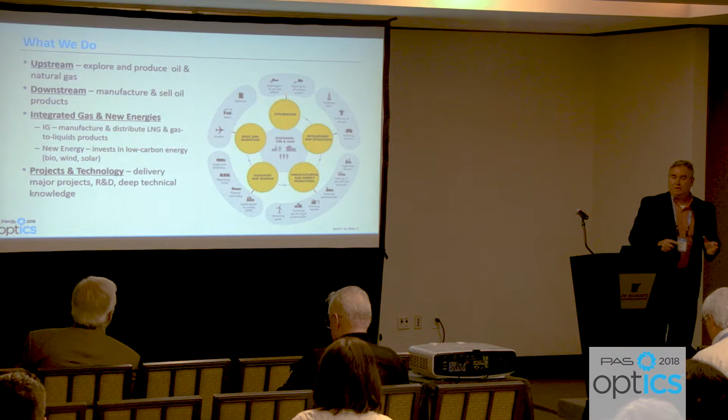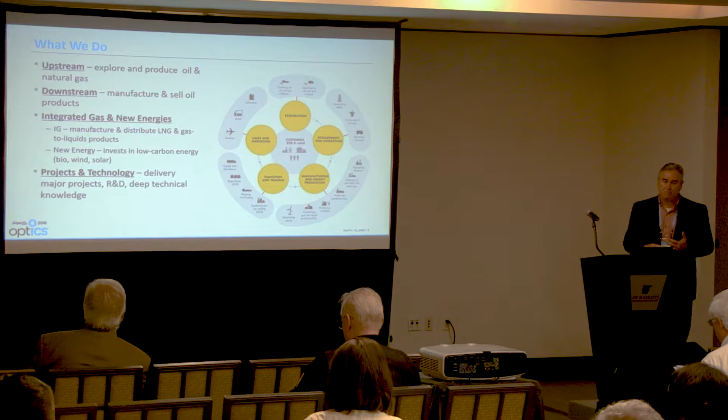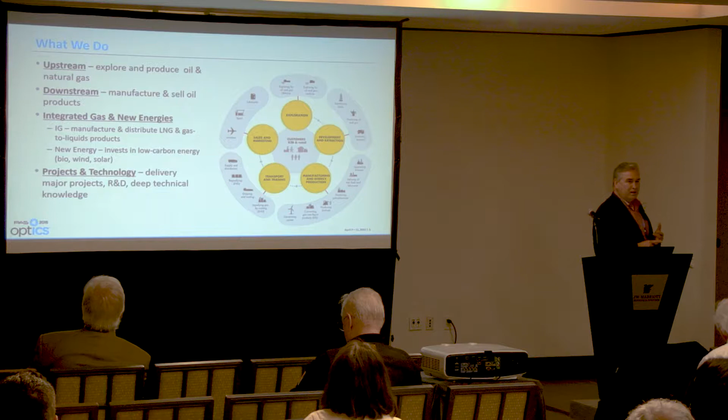So what do we do at Shell? We have four main lines of business: upstream, downstream, integrated gas and new energies, and our projects and technology group. In upstream, we explore and produce oil and gas reserves. In downstream, we convert oil into a range of refined products and sell them. In integrated gas, we manufacture liquefied natural gas and a range of gas to liquid products. And we also have a new energies group, which is looking into new low carbon footprint opportunities for the future.

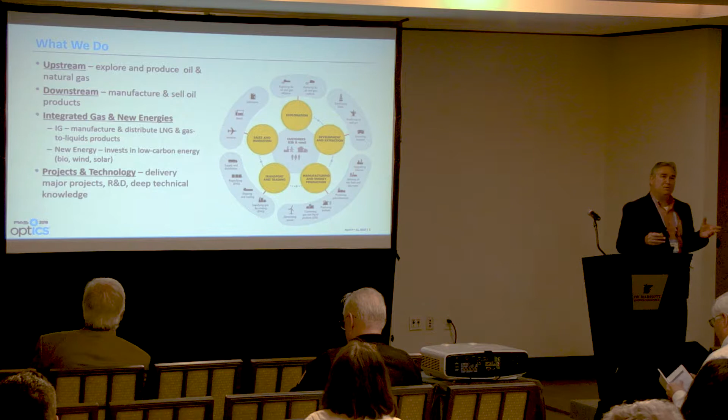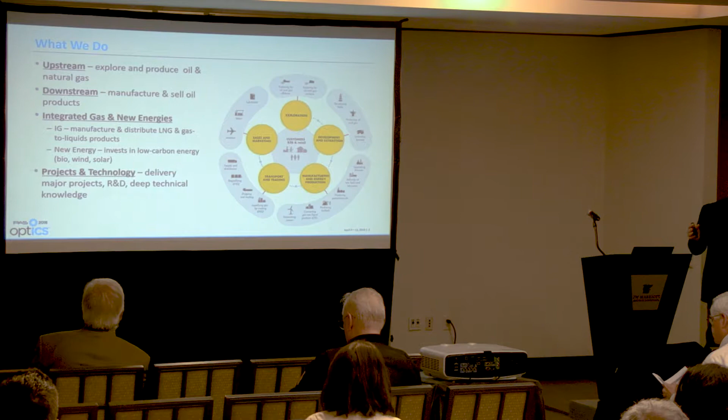And then in our projects and technology group, which is where I work, we're responsible primarily for delivering the capital projects into Shell's lines of business. It also houses the R&D function, and many of the technical experts we have across Shell, across the various disciplines like electrical, mechanical, civil, and in this space as well, are in P&T.

So today I'm going to talk about how we manage the ICS security risk within Shell. There's a term, process control domain, that we use so often that I'll be using it in the presentation. The process control domain houses our automation systems or our industrial control systems.

So again, it's a process. We call it manage PCD integrity, and it's supported by various things. We have leadership teams in place that are responsible for the process. We have technology that is supported. We'll talk about our secure plant technology, and that's a managed service from IT. We use reference architectures to standardize things.

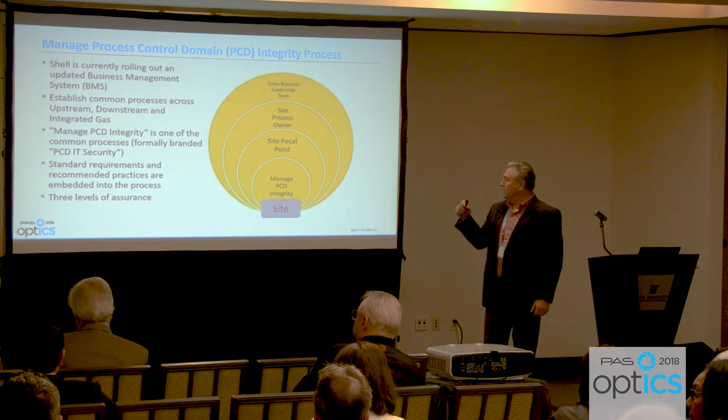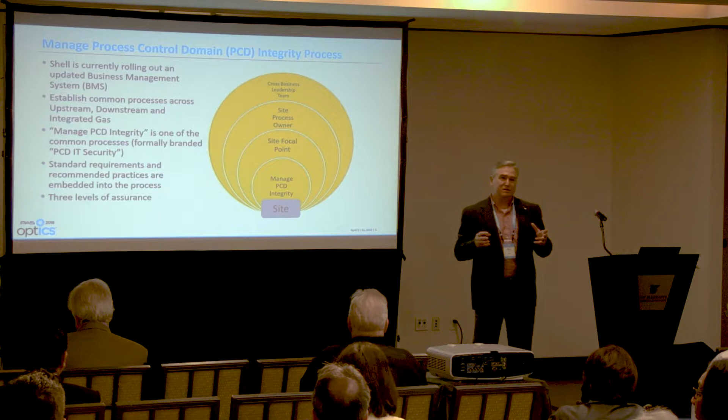It's anchored at each site, and we have a lot of sites across the globe. Each site has a site focal point that is responsible for the day-to-day implementation of our controls that are part of the standard, as well as sustaining those controls over time. Then we have a site process owner that is accountable for the process at the site, supports the site focal point, and is part of a business leadership team.

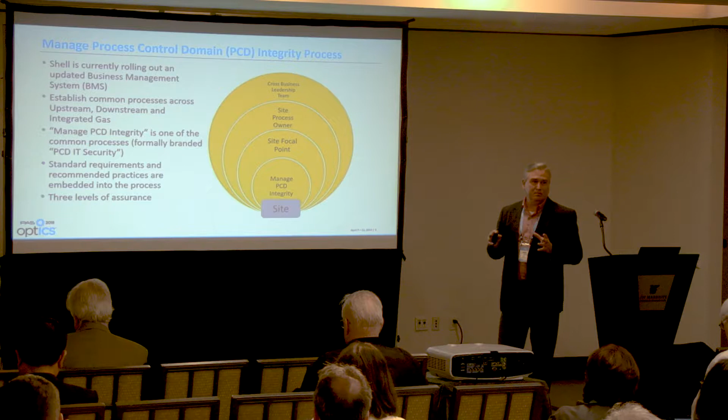And then we have a cross-business leadership team that is responsible globally for this process across Shell. They have regular meetings to talk about the health of the process, and it's a continuous process to move things along in terms of improvements. So this is the basic hierarchy of how it works. There are other things involved, and it's supported by standard requirements and an assurance model, which I'll talk about.

So within this business management system that we have, there's some standard documents, and one of them is a standard. The standard is those mandatory requirements that we have to implement in a given process, in this case, PCD integrity. We also have a document of recommended practices.

This is a little bit of a shift within Shell. In the past, we've sort of had one standard that represents our minimum requirement. And now we have a standard that's possibly even less than that, but the realization is that the sites have different risk profiles at the end of the day. And so the sites are required to implement these standard requirements, and then do some form of risk assessment to determine what, if any, of the recommended practices they should be deploying. So it's a risk-based approach and lets the sites implement the right level of security.

In our documents themselves, we're starting to organize them according to the NIST categories to sort of tie that to NIST. And when we're coming up with these controls, we're reviewing not only the NIST standard, but the IEC 62443 and even others. And again, to come up with these controls, we're working with both IT folks and engineering folks together on these initiatives.

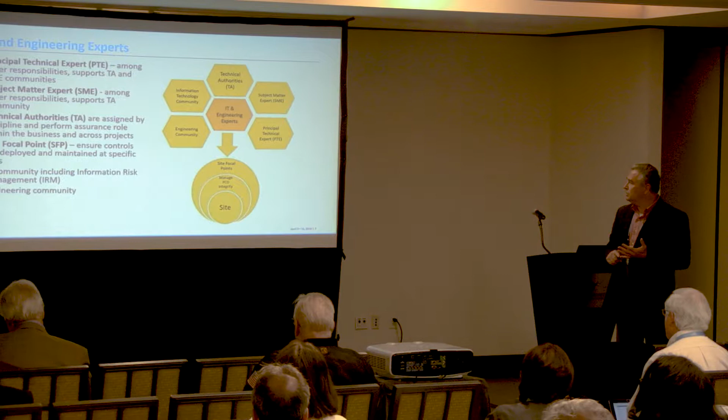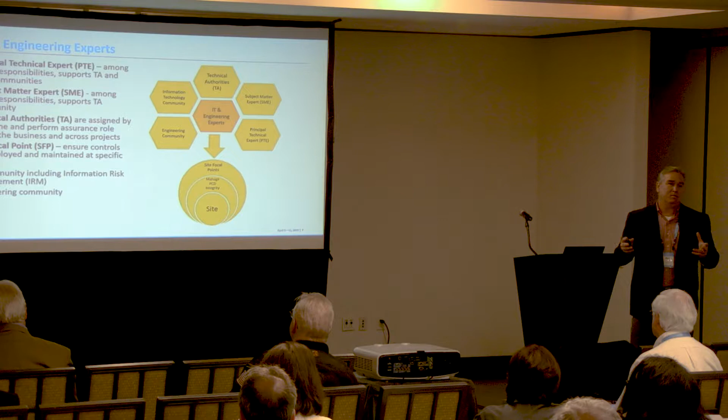So some additional roles that are used to support the process. We talked about the site focal point. We also have a role called technical authority. Technical authorities are folks that have been formally assessed for their knowledge in this space. Their role within the lines of business is to support the site focal points in terms of management of change, making sure that we're following and interpreting our requirements correctly when we implement new controls or change things. They also have a role within projects.

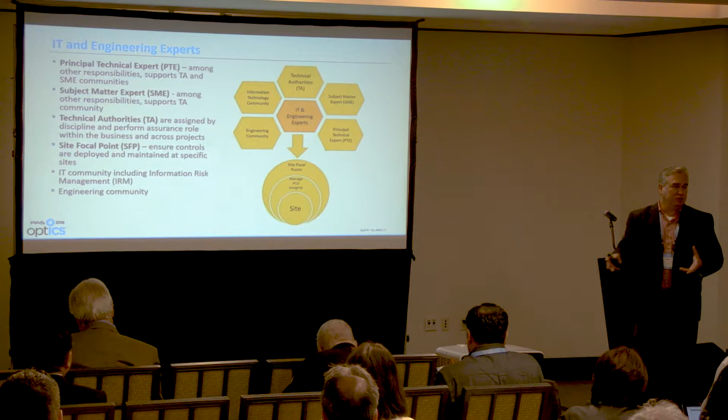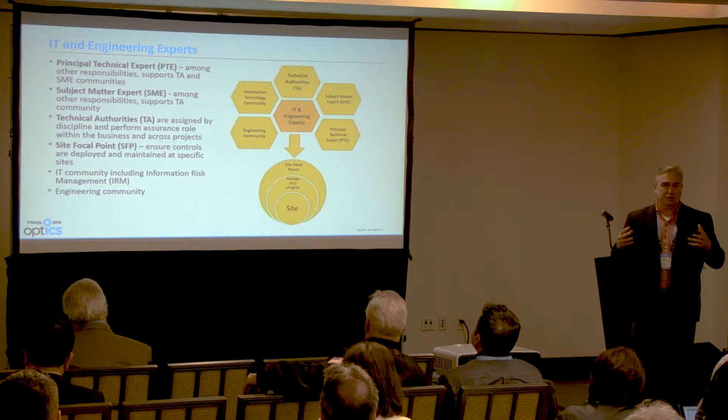So we do a lot of projects, and we roll those into the lines of business, and those projects need to have these controls built in when we hand them over to the business so they can operate this process. And so the TAs are involved in assuring; projects tend to be document-centric, so they're assuring these documents and assuring that the service providers are delivering the controls that we expect.

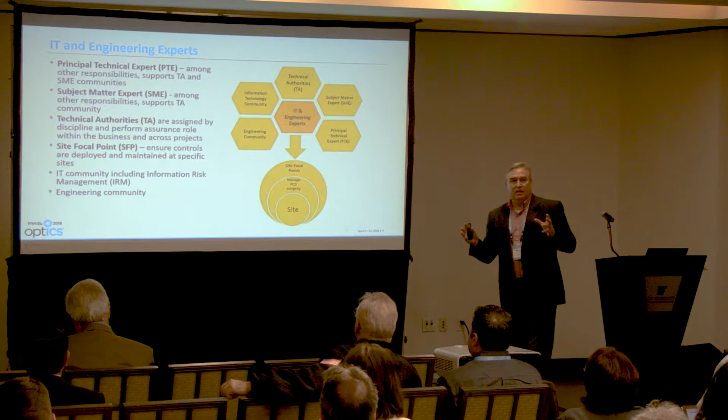Subject matter experts: again, the same hierarchy is used across all the disciplines within Shell, not just PCD integrity. We try to identify a few subject matter experts across Shell per discipline, and they will help with more technical things, interpretations where there may be some gray area in our requirements, and get involved in some technical situations.

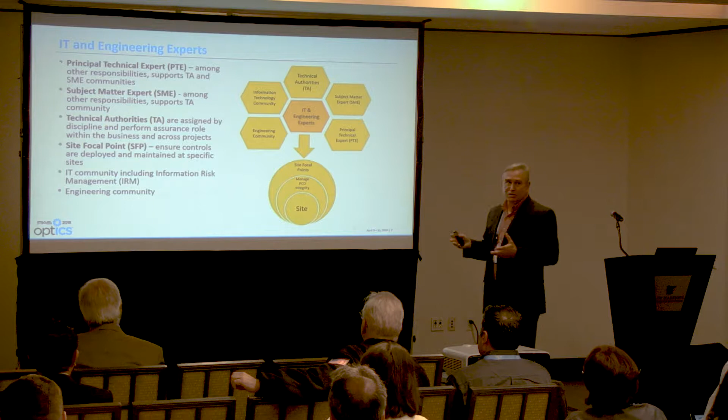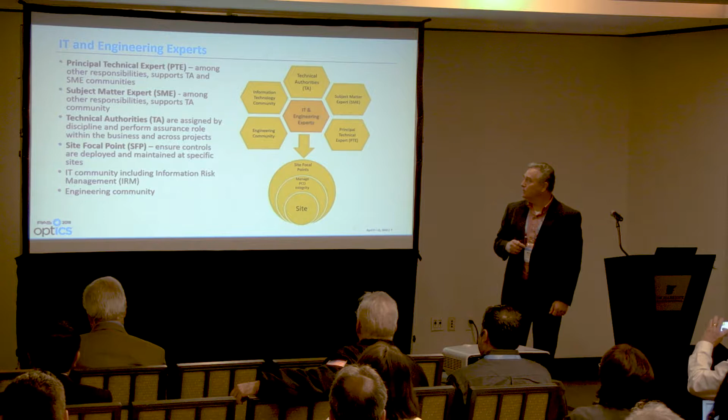Principal technical expert: there's at least one of these per each discipline within P&T, and amongst other responsibilities, they support the TA and the SME community, making sure that we have a good, healthy community and enough folks to do the work that needs to be done in that discipline. And again, these roles can be found not only in engineering, but also in the IT space.

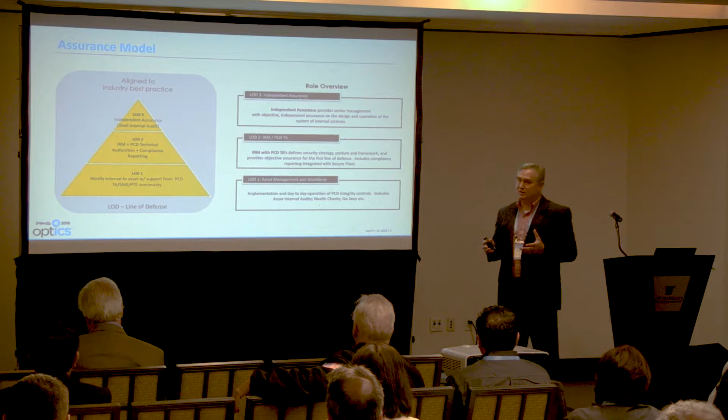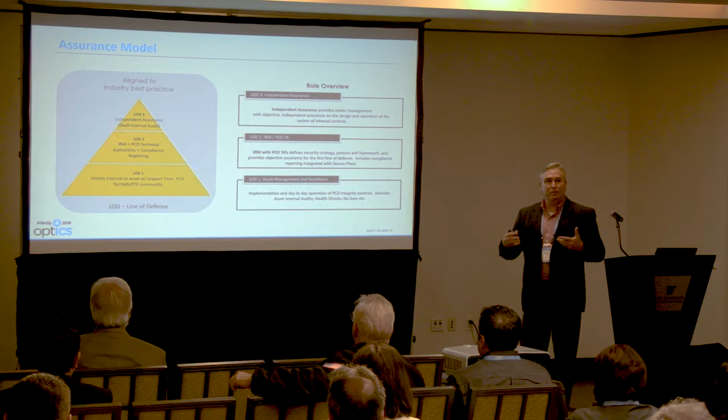The assurance model. So we have a three-tier assurance model. We call it lines of defense. The first level in this assurance model are activities and tasks that happen pretty much on a day-to-day basis at the sites. As part of standardizing all these processes, there's a process they use called a health check. There's a template with questions, and that's done on some frequency by the sites to do sort of a self-assessment. Then there's things like GO-SEES, maybe an internal audit, just site folks involved in that.

And then with LOD2, which is done periodically, our IRM folks get involved and help us perform this external review of the site. It involves site resources as part of the assessment, but we're bringing in folks from IRM and maybe some TAs to assist and do a periodic assessment of the controls at the site. It's also using some tooling that generates reports out of our Secure Plant technology, which gives inventory information, how we're doing on patching, are our antivirus signature files updated, and so forth. And so that's used as part of the assessment.

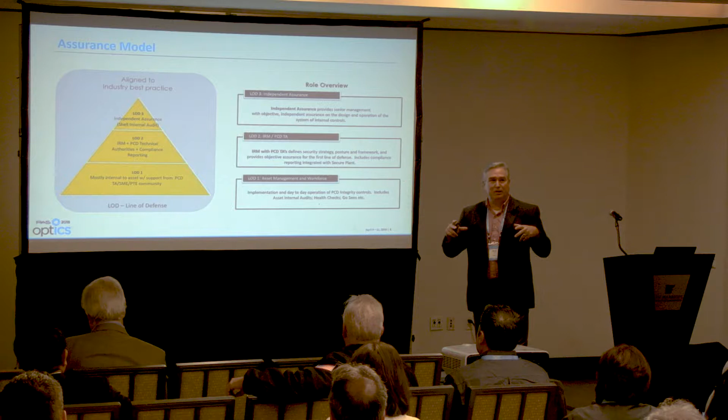And then level 3 is our traditional Shell internal audit organization. Really nothing changing there recently, and it's pretty much a totally independent audit. Outside folks come in and audit the site.

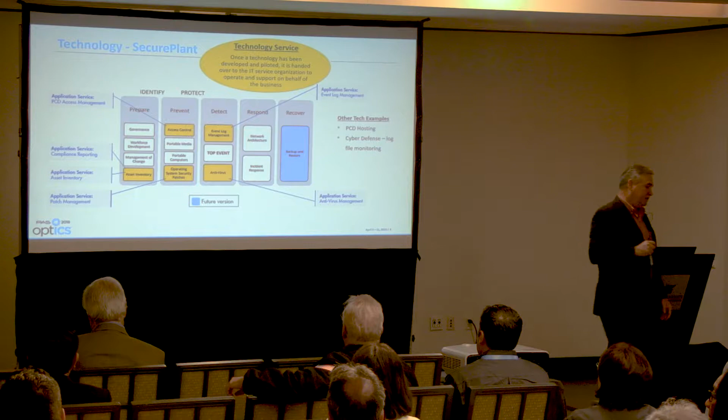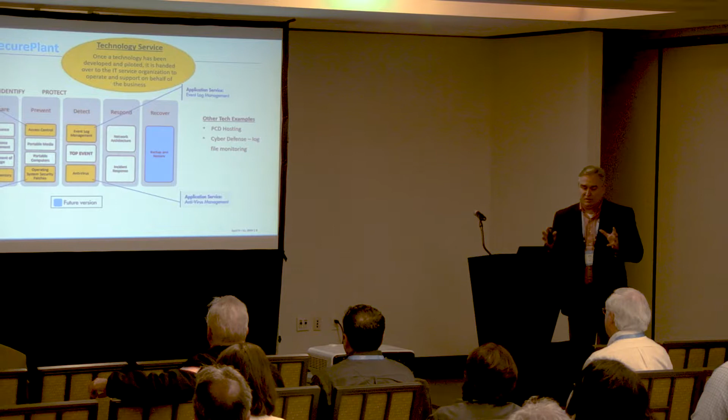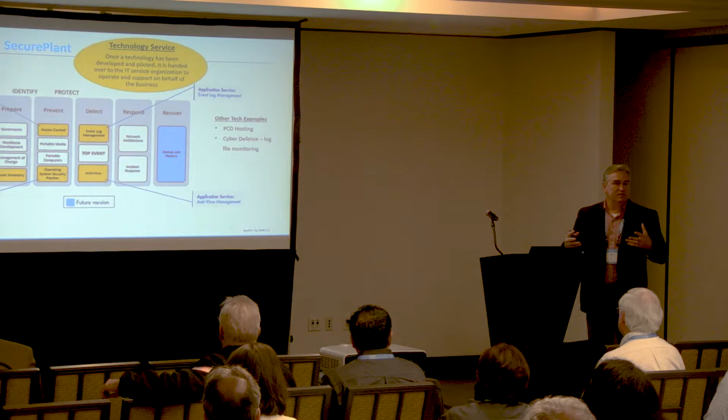So this slide, I'm going to talk about the technology. Secure Plant, we call it. It's a managed service, but it's also a partnership with Cisco and Yokogawa. It's essentially our DMZ between our process control domains and our office domain, and of course any other domain beyond that. The objective is to automate as many of these cybersecurity controls as we can. So the first one is asset inventory. Over the last 3 years we've been rolling this out. I would say somewhere between 80 and 90% of all the sites have this technology now across Shell.

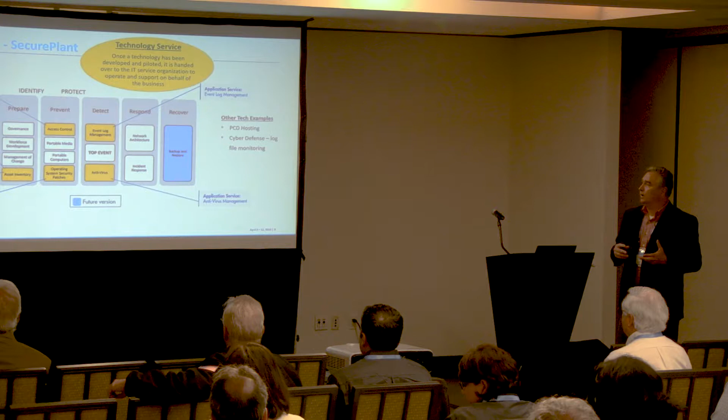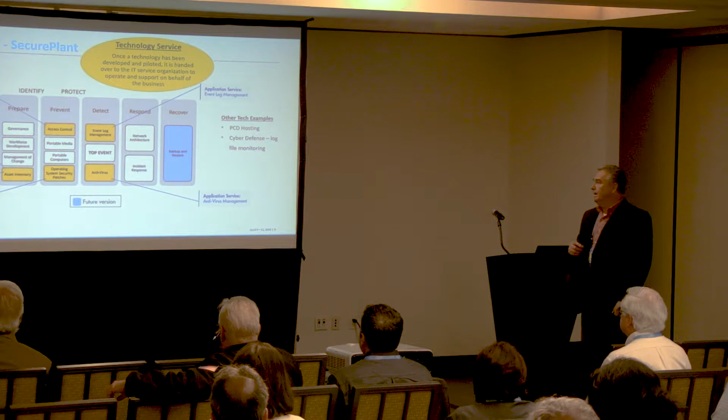And as it's rolled out, the asset inventory process is that each system is explicitly enrolled into this system. So Windows machines, network equipment, and so forth get enrolled, and so we have that asset inventory. Then the system can report on software that's installed in the Windows boxes, the versions, and same thing with the network gear, like the IOS versions and so forth. There's been challenges around that. Not everything is necessarily in the network, so there is some manual input into that as well.

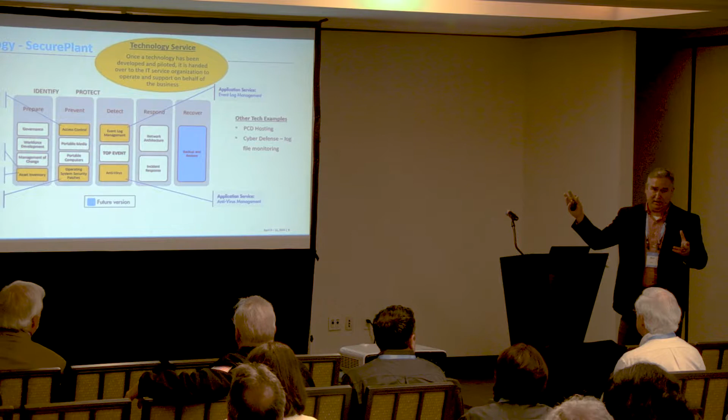Access control: it has a robust remote access portal where we require two-factor authentication. So an example would be somebody maybe sitting in the office domain, or even potentially a service provider, third party, needs access to some equipment in our process control domain. They would access this portal for remote access. They would have a token, and they would use that to then log into the portal. And from there, based on their rights, they would use typically RDP, for example, to then access a machine in the process control domain.

Operating system security patches. We do have some partnerships with some of our major suppliers, and there is a connection with SecurePlant, or an integration with SecurePlant, and they provide qualified patches into the system, and then those are distributed down to the sites. They're not automatically installed. The site focal points are still responsible for installing those patches, which often require reboots, for example.

Antivirus: again, the point there is that we want to automate the deployment of these signature files, which come much faster even than the patching. And that's more automated. Those do get pretty much installed automatically. There's not a manual installation of that.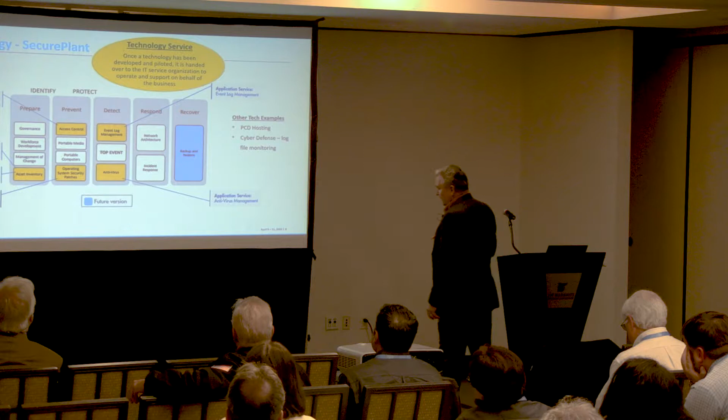Event log management. We haven't had a robust event log management in the past, but we have a project underway now to integrate our event log management into our office domain cyber defense team. So in the office domain, they have more advanced tooling that they've been using over the years. I would say we're behind on the OT space relative to our IT or business space.

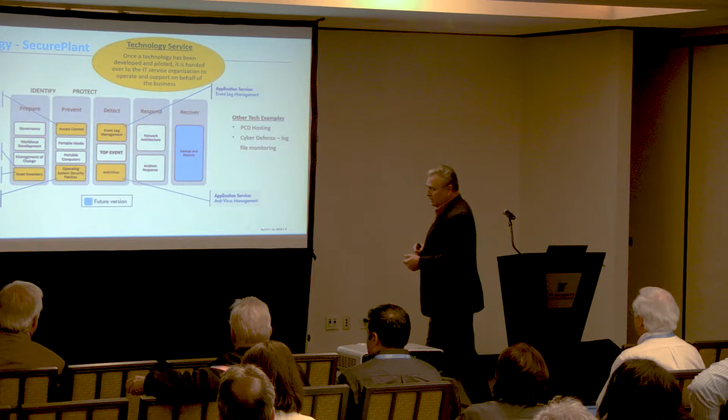But we have a cyber defense team, and they have tooling that ingests log files, and it's based on Splunk, and they can crank through that data and pick out maybe interesting events that need to be investigated or followed up on. So we're in the process of integrating our process control domain logs into that system as well.

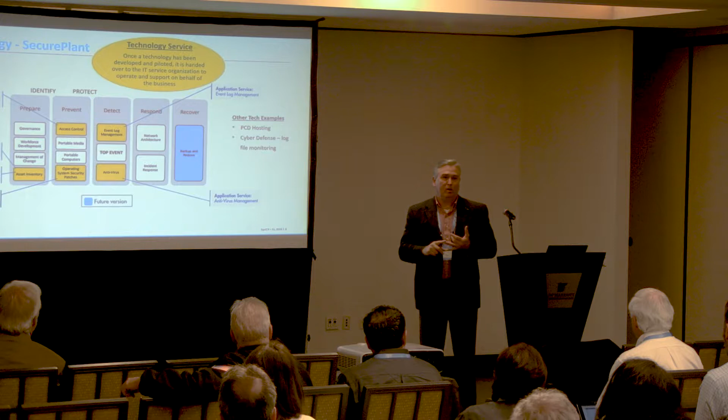And I think one last thing on this slide, PCD hosting. We have another technology. It's another IT managed service. In the past, typically at level 3 in the Purdue model, the businesses over the years have deployed applications at that level, maybe above the control systems, but not in the office domain. And they're responsible for the hardware, the operating system, and the application. And so the idea with the PCD hosting service is to have a managed service to manage the hardware and the operating system, and then the business would just have to manage the application.

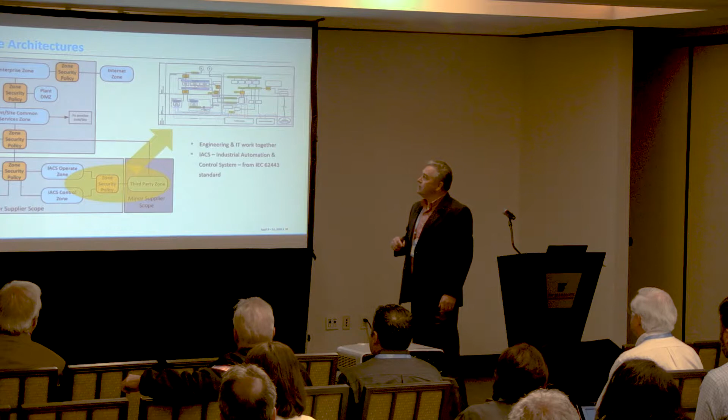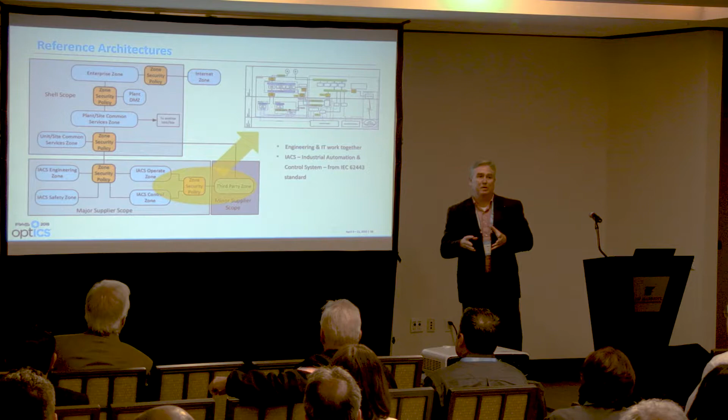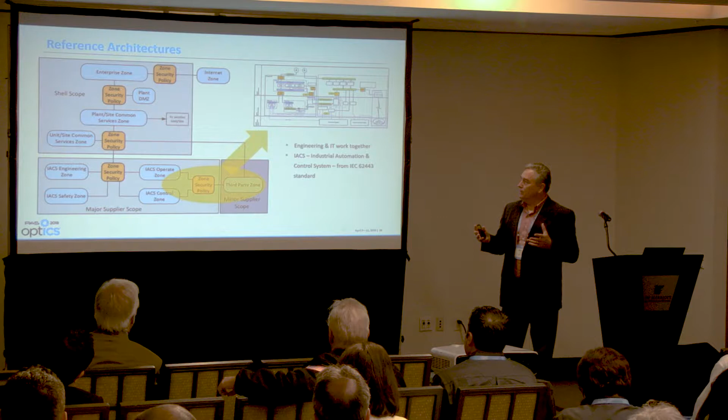Reference architectures. The objective here is to try to standardize. You know, we have a lot of sites across Shell. We try to keep the suppliers that we work with to a minimum, and within that set of suppliers, we try to standardize the way we deploy their kit. And so on this slide, I'll talk about major suppliers and minor suppliers. For example, on a project, we would have a major supplier providing the bulk of the automation system, and with our major suppliers, we maintain toolkits. We work with them, and we standardize many of the ways we deploy their kit.

And for example, function blocks. We try to standardize the way we deploy and maybe configure function blocks. But another thing that we do is in terms of zones and conduits, from a network architecture point of view, we try to standardize that. So we put together some network architecture drawings, and we get into agreement with the supplier on that. That goes in the toolkit so that when projects come along, they have a good starting point. You know, they don't have to start from scratch.

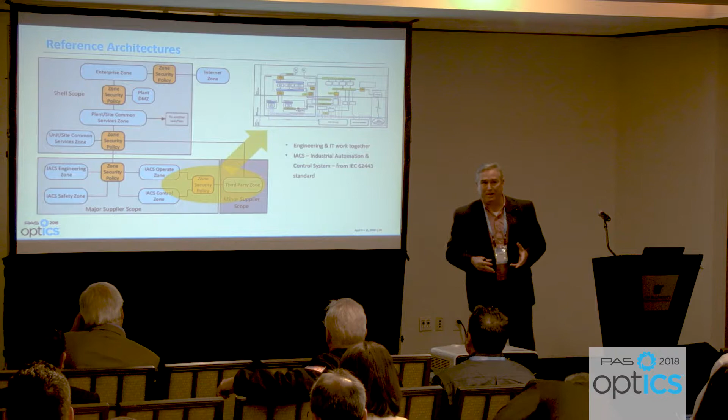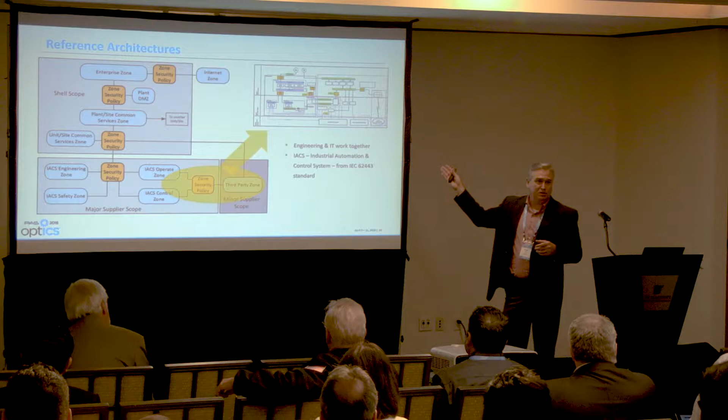And in most projects, there's always a set of these third-party suppliers to bring in packages. We call them third-party packages. And we want to standardize the way those packages are deployed as well and how they interface into the DCS. And so we'll work with those suppliers, again, to create a reference architecture so that we're trying to do that the same way across Shell. So the idea here is to try to standardize and do things the same way.

So workforce and knowledge. Again, this is common across the different disciplines within Shell, but within each workforce or discipline, we have workforce development materials and a process in place to progress employees over time with their knowledge and skills. And that involves job competency profiles, recommended training, self-assessments, and maybe in cases like TAs, more formal assessments of their knowledge. And so the idea would be, in this space that we work in, we call it PCD integrity.

It's really a hybrid skill set required, right? You need IT skills, and you need engineering skills, and so how do you get that skill set? It's tough, but a roadmap might be, a person would work on a project and work with the automation team to deploy a system, and they would gain knowledge around industrial networking and architecture, operating environments and hazards, process safety management, et cetera.

And then maybe in another project or another operational role, maybe work for IT for a while, and maybe pick up things around business risk management, cyber incident response, IT audit and compliance, those sort of skills. And so over the course of a career, you kind of build this hybrid skill set. And then rounding out things, knowledge of IT architecture, networking and communications, data management, all these are skills that we need to be successful in this space, essentially.

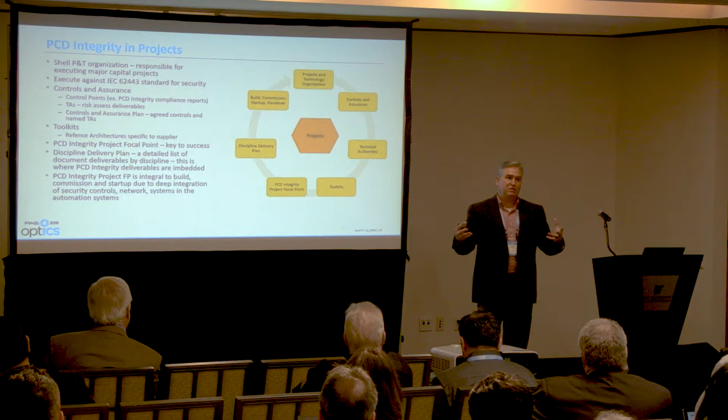Virtualization is coming into the picture, and so this focal point becomes sort of the glue that manages all these interfaces, making sure that all this stuff works together, integration is done right, and the cybersecurity controls are implemented properly. And in the ideal case, that resource would begin the project during the FEED phase and would stay on the project all the way through build, commissioning, startup, and handover.

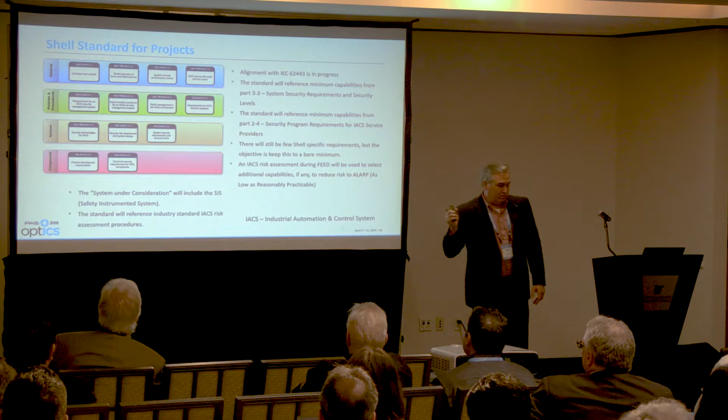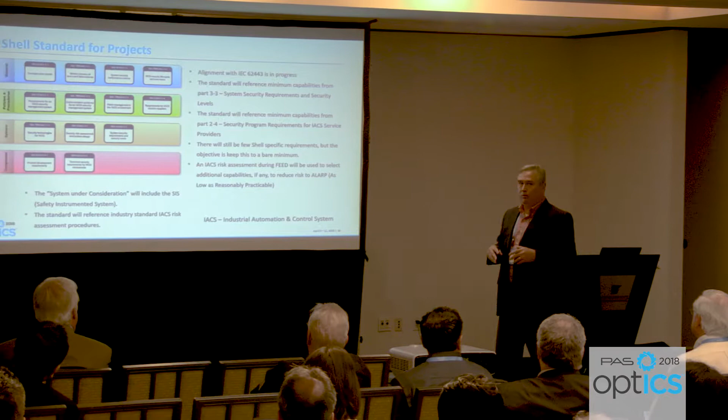So Shell's been on this journey with respect to PCD integrity for 15 years or so at this point. I've been involved about 10 or 11 years myself, and we've had standards all along the way. We've been developing internal standards around this space for a long time, and we've been talking recently about how we really need to get away from Shell standard clauses about our requirements and start using an external standard. So we're in the process of updating that now, and this is a project standard.

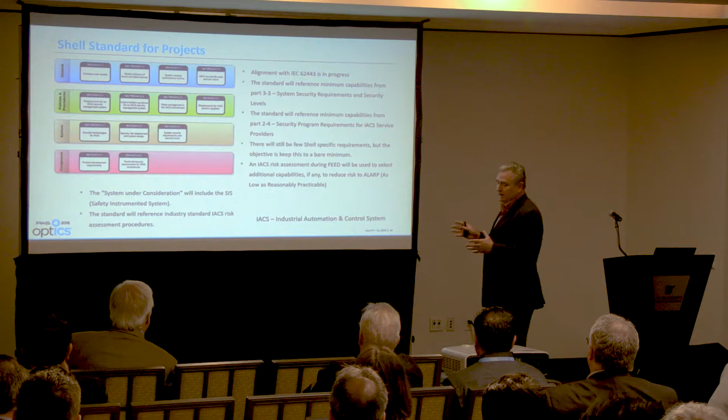So let me clarify on what we call the operate phase, when the lines of business are operating this PCD integrity process. We have this business management system and that standard and that recommended practice I mentioned earlier, which involves a risk assessment to select those recommended practices. Well, this is primarily a project standard, and it's a little bit different.

And so the objective here is that for this next rev of our standard, we're going to go referencing 62443 in a substantial way, and specifically two of the parts. Part 3-3 is system security requirements and security levels. And so the idea would be that we would specify a minimum set of system capabilities in the standard. And that would be things like the system shall have the ability to authenticate a user.

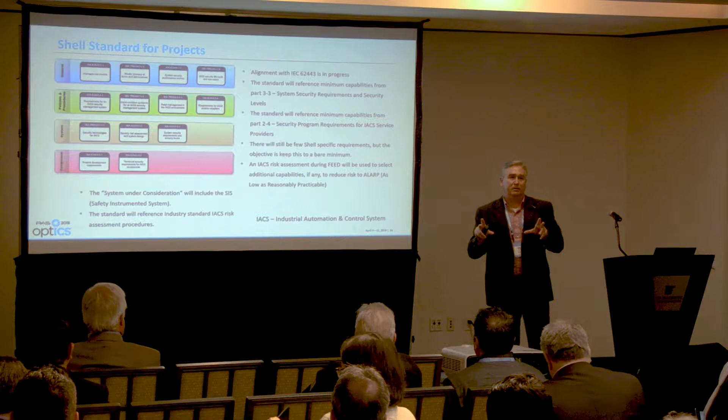And then the next part, 2-4, is security program requirements for service providers. So those are service provider capabilities. A service provider may be an EPC. And so we'll specify a minimum set of service provider requirements. And then there's probably going to be some Shell-specific things in there. We probably won't get rid of all of them.

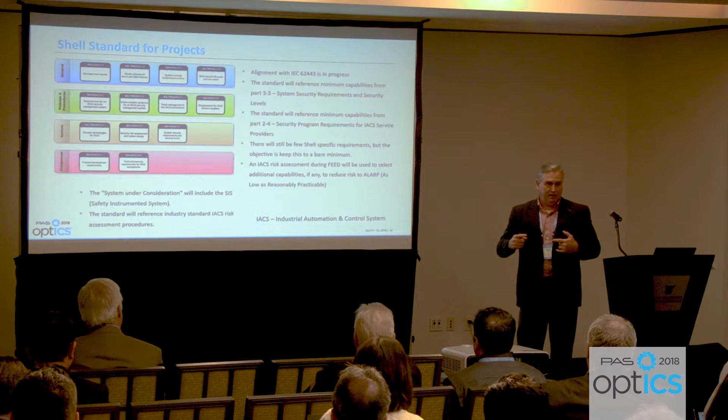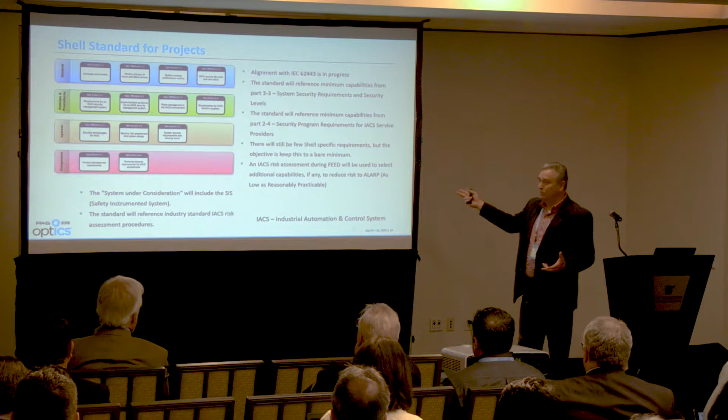And then we would expect the service provider to do a risk assessment. And there's some standard risk assessments out there, including one of these parts is a risk assessment procedure, and there's others, IACS-specific risk assessment procedures that can be used. And the output of that risk assessment would be what additional controls we need over and above those minimums for the project to be what we call ALARP in terms of risk reduction. And ALARP, as low as reasonably practicable, that's a term within Shell, it may be an industry term as well.

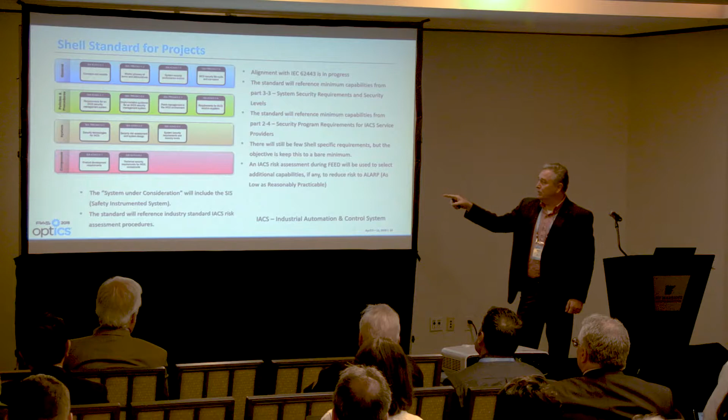And so the idea there is that the output of the risk assessment plus those minimum standards would be the project cybersecurity requirement specification, and it would go off and execute that. And then this risk assessment would include, as the system under consideration, the safety instrumented system as well.

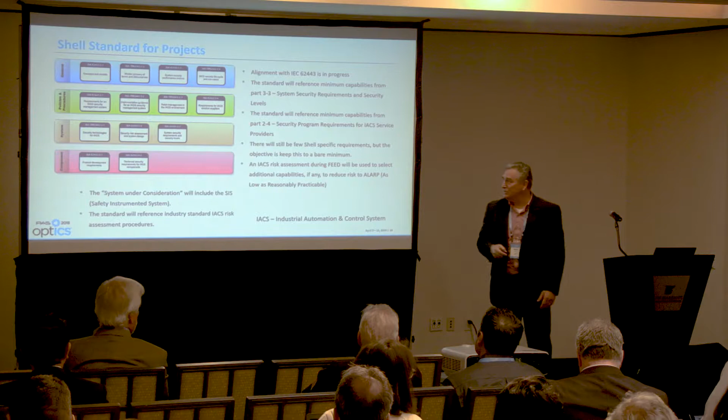I don't know if I'm seeing the signs. How much time? 4 minutes. Okay, yeah, I missed the signs. So anyway, let me move forward.

I have some. Okay. Yes. Questions for Mark? Thank you, Chad. All right, and thank you, Mark.

So when you get to the point where you're assigning a focal on a project to follow the project through the rest of the process, are you choosing an SME that has knowledge in that space, or are you just handing it off to a project manager that knows how to run a project? It's typically not an SME, but it is either a Shell staff or even a contractor oftentimes that has the skill set. We look for certifications like GICSP or CISSP and so forth.

And again, that's one of the challenges. Finding those people is hard, and so we develop these relationships with these folks and try to get them up through a few projects and keep those folks close. But those are the type of folks that would execute that role. Yeah. It's supported by the TA community.